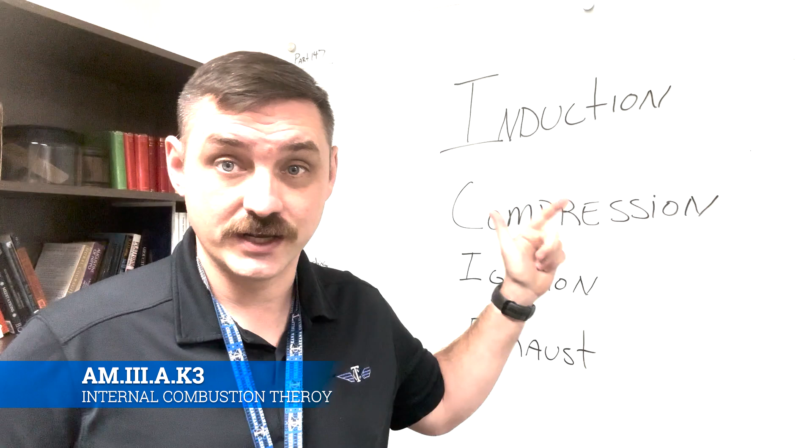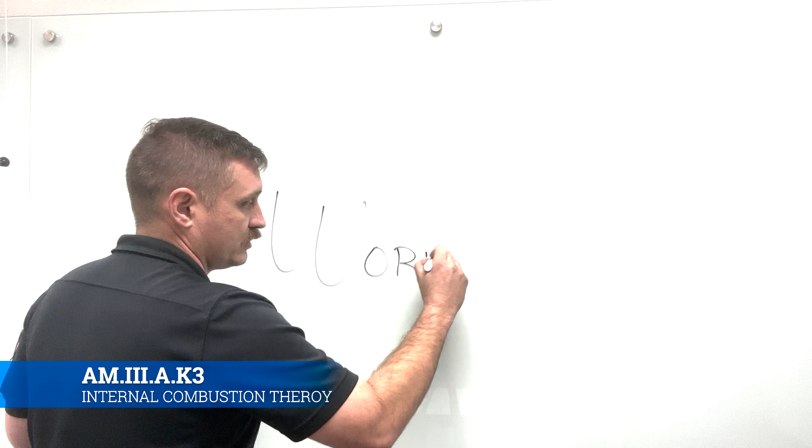Okay, since this is our first video on engines, we want to talk about some basic engine terminology that's going to get thrown around a lot, and we want to put some definitions to it so that way we all understand what we're talking about. First one that we're going to talk about is work. All right, so what is work?

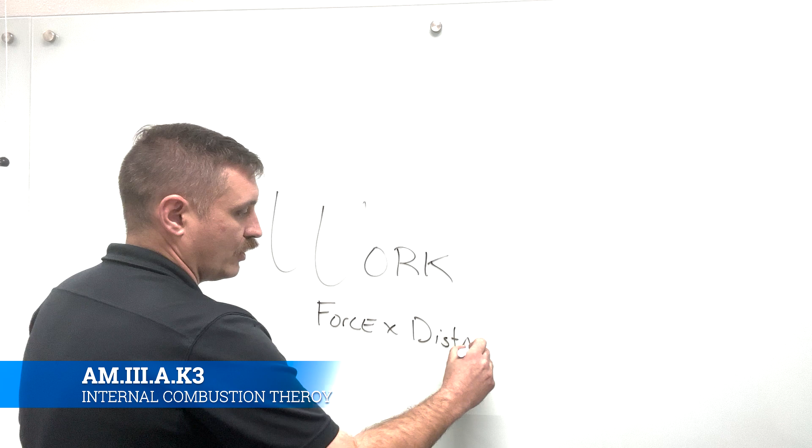Work is nothing more than the force required to move something over a set distance. That's all that work actually is. It's just force times distance equals work accomplished. All right, horsepower. Horsepower is another one.

Put yourself in the time period whenever the engine first came around. It's like the Industrial Revolution. Everybody's actually using horses. Horses made it all the way through World War I, and horses are even still being used in World War II. There's famous episodes of Band of Brothers where they end up shooting up a bunch of dudes on a horse cart, I think on the night that they jump into Normandy.

If you watch the movie Fury with Brad Pitt, they'll talk about how they killed so many horses during the first days of Operation Overlord. The reason being is that horses were still widely used. They were cheap, they were readily available, the infrastructure was already set up for horses, and so it became natural to compare the work of a horse with the work of an engine, and so that's how you get 1 horsepower, the power of 1 horse.

So I guess you're either loading it up on your horse or a wagon, or you're running off with it by foot. Either way, it had some advantages. So what is a horsepower?

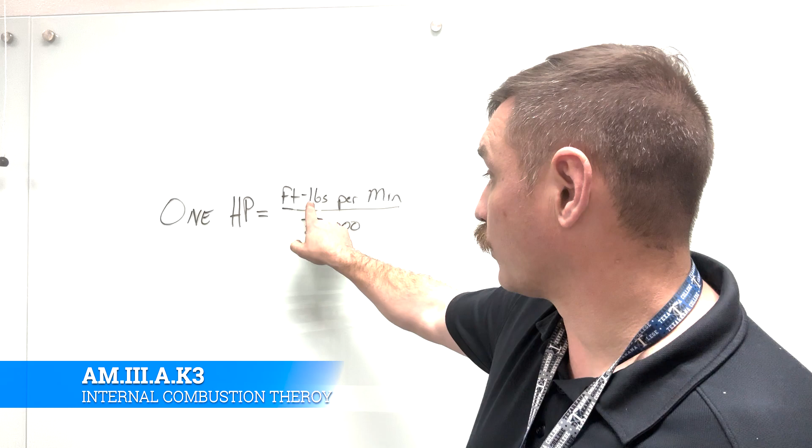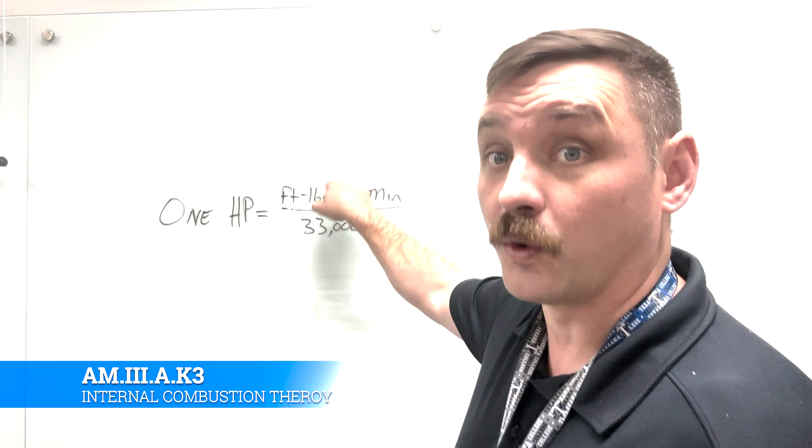Okay, 1 horsepower is equal to the foot-pounds per minute divided by 33,000. It's a ratio between foot-pounds over 33,000. Remember, work is the force, this time rated in pounds, how much weight it has to go over distance, or multiplied by distance. So you'll say, foot-pounds, that's that work, work done inside of 1 minute divided by 33,000. Now you can also do it by seconds and divide it by 550 pounds.

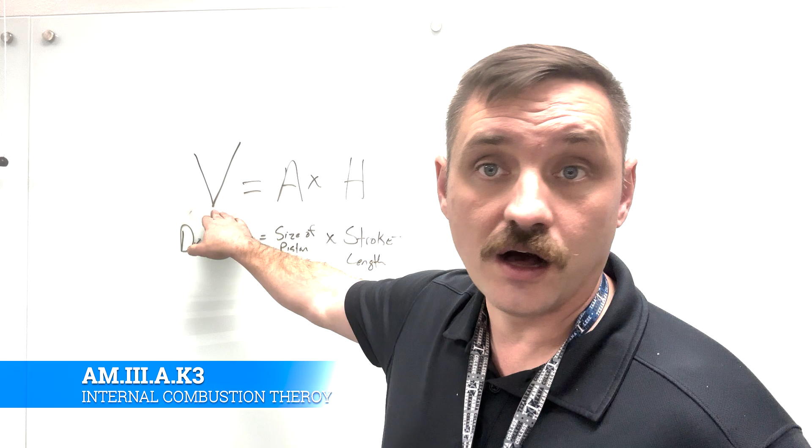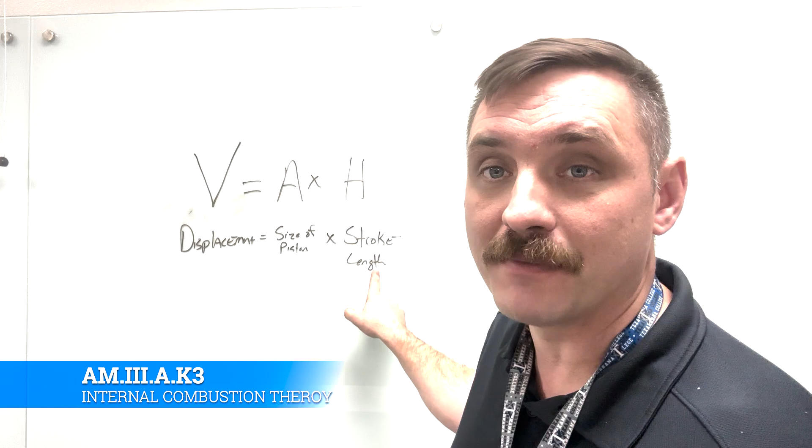Okay, so piston displacement is nothing more than the volume of a particular cylinder, right? That's going to be area times height, or displacement equals the area of the head of the piston multiplied by the stroke, the length the piston has to travel. That gives us the cubic inches of volume that piston is displacing. So you'll hear displacement thrown around a lot in engine talk. That's what they're talking about: the amount of air inside of that cylinder that's actually getting displaced every time that engine turns over.

So if you had a 4-cylinder engine like an IO320, if we're going to stick with the IO320 for the rest of the video, it has 4 cylinders. So if the displacement is 10 cubic centimeters, you would multiply that times 4. So now it's 40 cubic centimeters of displacement. Now, I have no idea what the IO320's displacement actually is, but that's how you would figure it out. So anytime you hear displacement, this is what they're talking about.

All right, let's talk about indicated horsepower versus brake horsepower. People will throw around brake horsepower all the time. They'll say this engine has 100 brake horsepower, but they don't really know what brake horsepower actually means, because they don't know what indicated horsepower means. Indicated horsepower is the amount of power that the engine actually develops without any friction taken into account. So it's always going to be higher than your brake horsepower, because brake horsepower takes that friction into account.

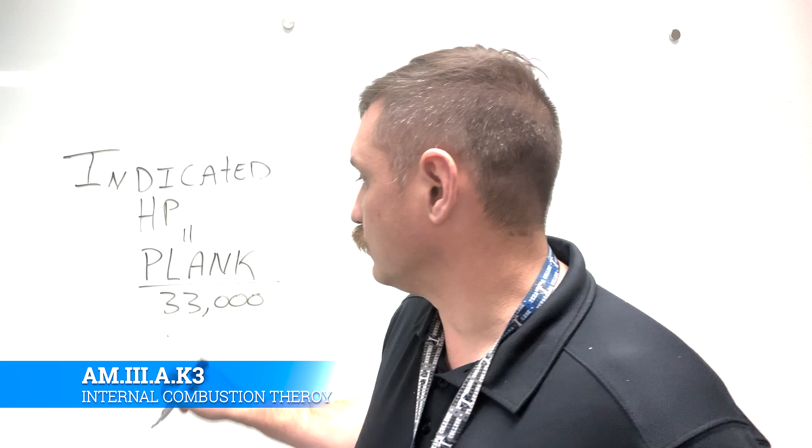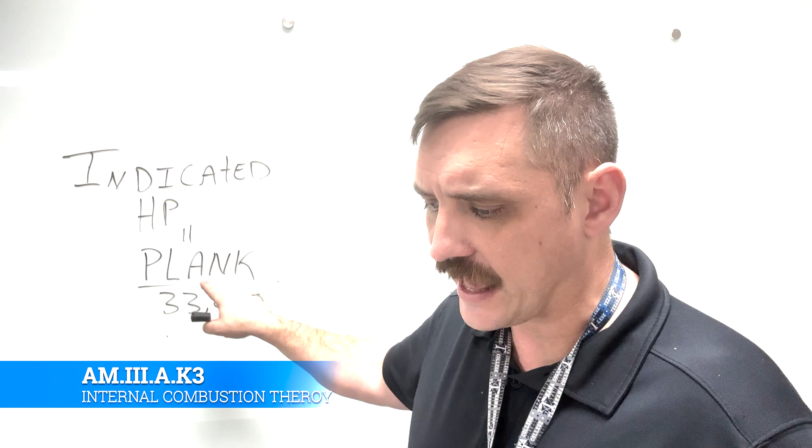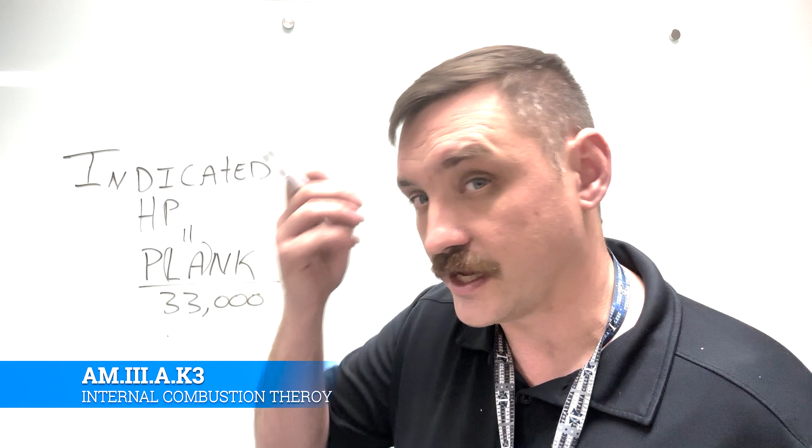The way that we calculate indicated horsepower equals PLANK divided by 33,000, where P is the indicated mean effective pressure in PSI. So that's how much pressure the engine is developing. L is the length of the stroke, so how long that piston is moving up and down. A is the area of the piston head or cross-sectional area of the cylinder in square inches. So here's your displacement right there, and this is the actual pressure.

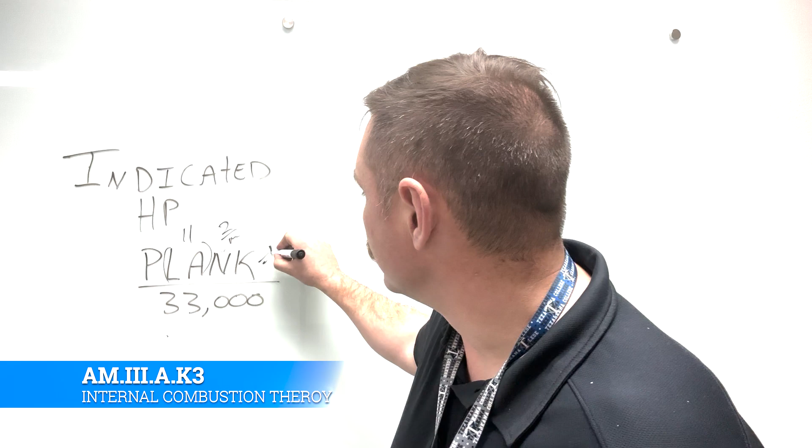N is the number of power strokes in a minute, so like RPM, expressed as strokes per minute for that particular engine. And then K is the number of cylinders. So in our case with the IO320, this is going to be 4. You'll total all that up, divide by 33,000, and that gives you the indicated horsepower for that engine. Now let's look at brake horsepower.

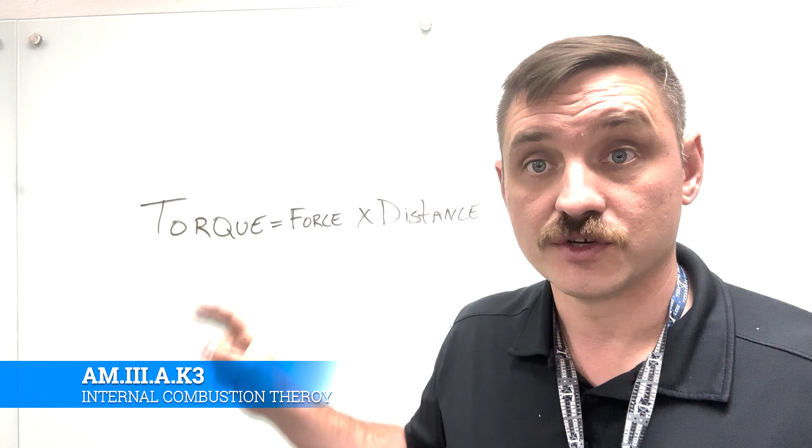Okay, brake horsepower is totally different. Whereas indicated horsepower measures a lot about the engine internally, brake horsepower is a lot more focused on torque. Torque is nothing more than the amount of twist being placed on an object. We measure that twist by force times distance. Once we've figured out the torque of an engine, we can extrapolate how much brake horsepower is there.

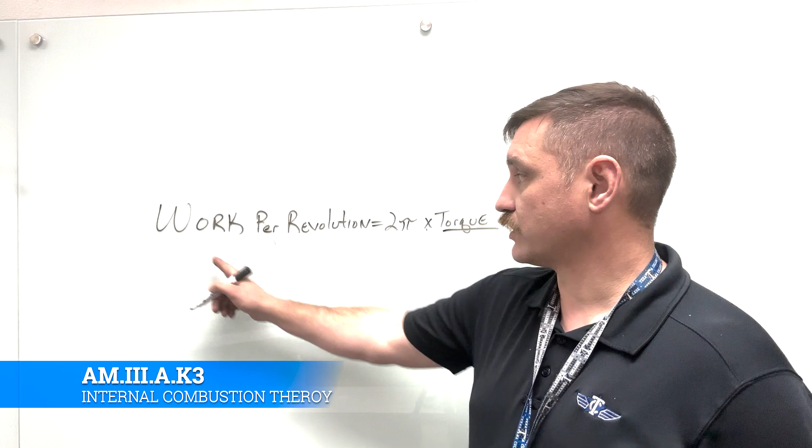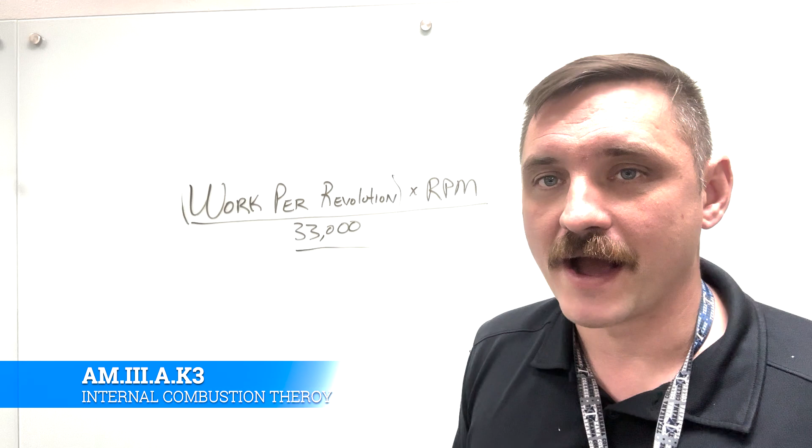We know the torque, so we can figure out the work per revolution by multiplying torque by 2 times pi. That gives us our work per revolution. So the final step in figuring out brake horsepower is to take our work per revolution, multiply it by the RPMs of that engine, say 2,000, and then divide it by 33,000, our magical horsepower number. This will give our actual brake horsepower at the wheels.

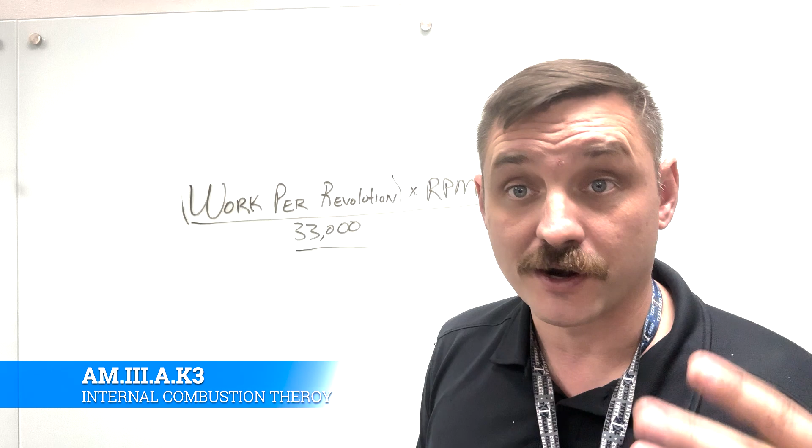So whenever you put a car on a dyno or use a prony brake to actually figure out how many brake horsepower you actually have, you can then look at your indicated horsepower on the other side. And you say, oh, well, this is what brake horsepower is, but indicated says this. And that will tell you how efficient or inefficient your actual engine and your drivetrain is.

You can look and say, okay, well, we have 100 indicated horsepower, but we're only getting 50 brake horsepower. That means that we're losing 50 horsepower somewhere in the midst of that. And the older an engine gets, the older a drivetrain gets, the more horsepower loss you'll actually have.

If you like to watch old car shows and stuff, they'll always make a joke that, oh well, this is supposed to have 1,000 horsepower, and then they all laugh because they know that this car is super duper old, and so they only know that it has like 200 horsepower because of all the wrongness that's going on inside of the engine.

When you look at an aircraft, it's the same thing. The engine may be rated for, say, climbing at a certain airspeed, because it's rated at a certain horsepower. But the thing is that as the engines age, as they wear down, as they break down, they have a lower and lower brake horsepower. They just get worn out, just like people do.

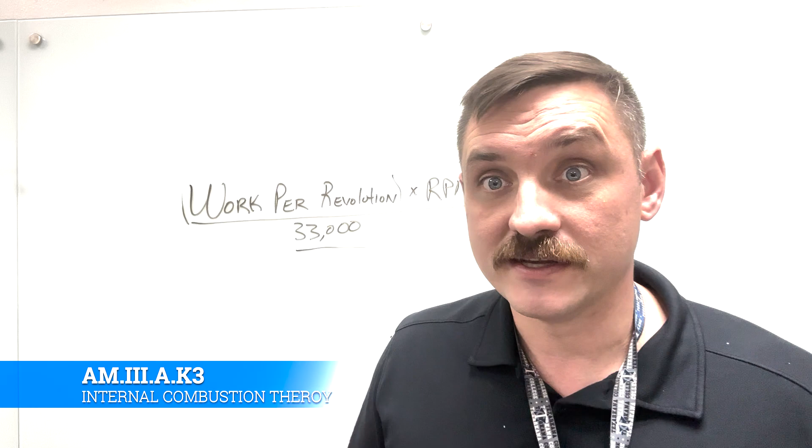Like my grandma can't run a marathon the way that my cousin can. It's just because one of them is in their 90s and the other one's in their 20s. It's really that simple. So that is the difference between indicated horsepower and then brake horsepower.

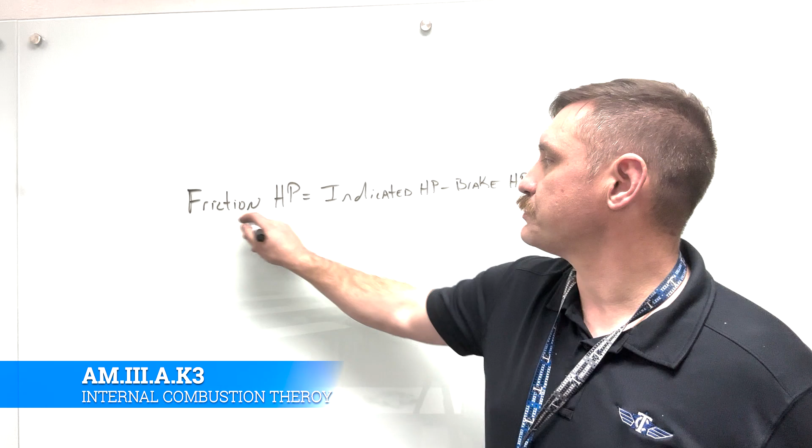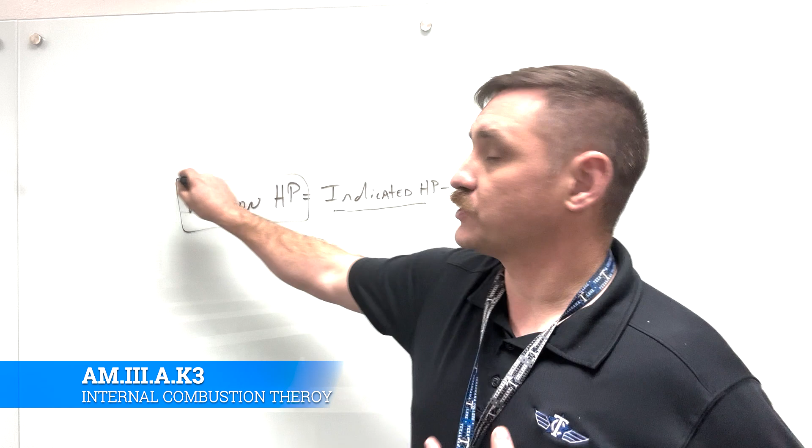Okay, now let's talk about friction horsepower. All right, and there's nothing really more to talk about than what we already have. It's simply indicated horsepower minus the brake horsepower, and that will give you the number of how much horsepower you've lost in the production of that brake horsepower.

It's just a more succinct way to say this is what we should be producing or what we actually are producing versus what we are actually receiving at the wheels or on the prop or whatever. And that difference between the two is friction horsepower.

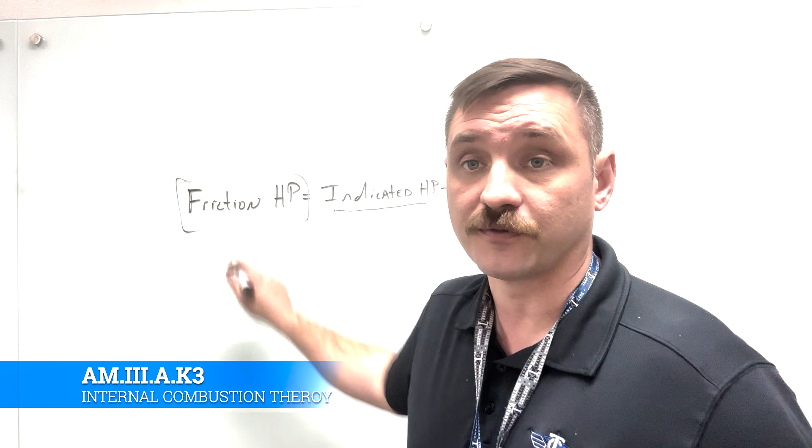Okay, so compression ratio. We talked a little bit about this in general when we were talking about ratios. Now let's dig into and figure out what exactly a compression ratio is. So here's a definition out of the book. The compression ratio of an engine is a comparison of the volume of space in a cylinder when the piston is at the bottom of the stroke to the volume of space when the piston is at the top of the stroke. So let me draw this out.

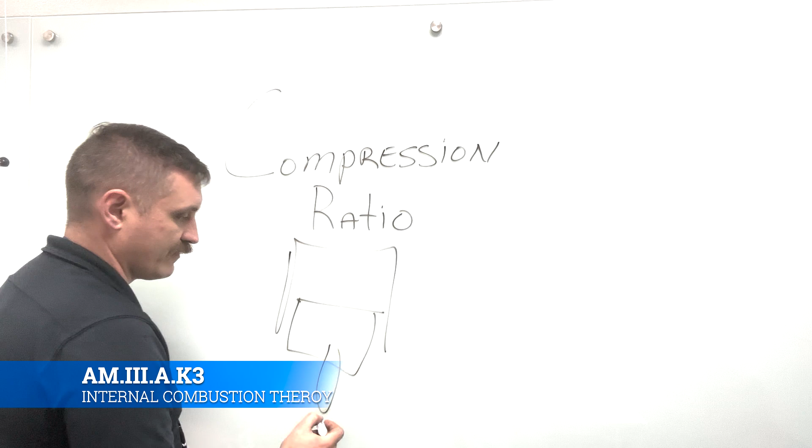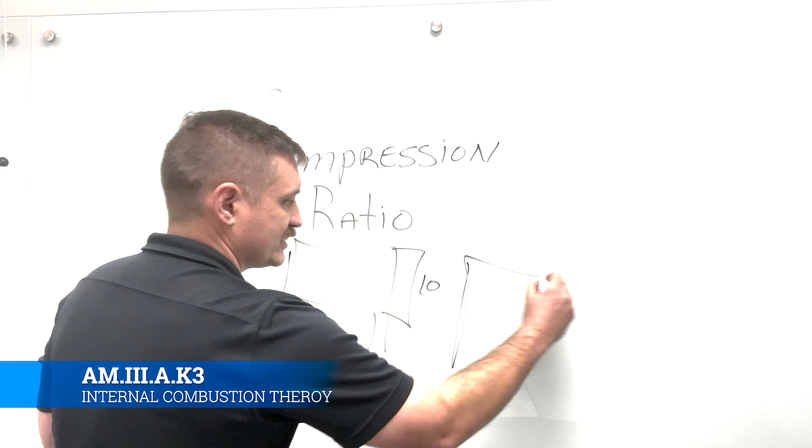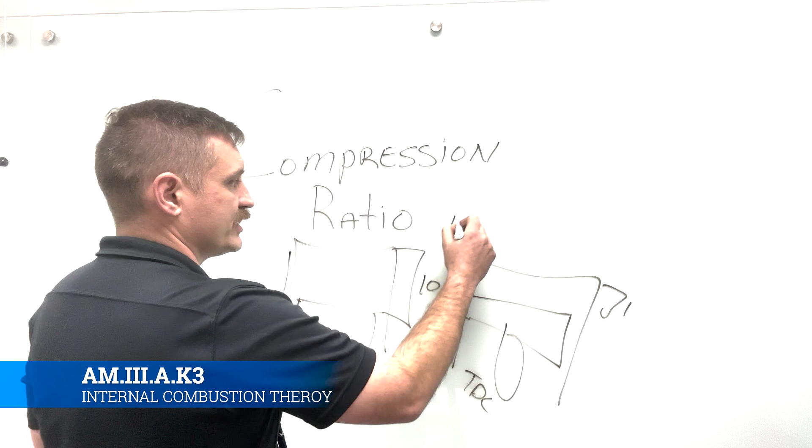So if you have a jug, and you have a cylinder, or you have a piston that's going in there, you have a space. And so this is going to be bottom dead center right here, all right? There you're at BDC, and say it's 10, okay? Then the same piston comes up, let's say at top dead center, so there's TDC, we'll do it over this side, it's 1. So this has a compression ratio of 10 to 1. That simple. And so that allows you to get a feel for what that piston's travel is inside of the various strokes.

Okay, so why do we want to know the compression ratio? Why is it relevant? Let's just keep reading in the book here. It says compression ratio is a controlling factor in the maximum horsepower being developed by the engine. So different compression ratios, that controls the total power the engine can actually develop. But it's limited by present day fuel grades and the high engine speeds and manifold pressures required for takeoff.

All right. For example, if there are 140 cubic inches of space inside of a cylinder when the piston is at bottom dead center, and there are 20 cubic inches of space when the piston is at the top of the stroke, the compression ratio will be 140 to 20. This ratio is expressed in fraction form, which would come down to being 7 to 1. So 140 divided by 20 is 7 to 1. That's a 7 to 1 compression ratio.

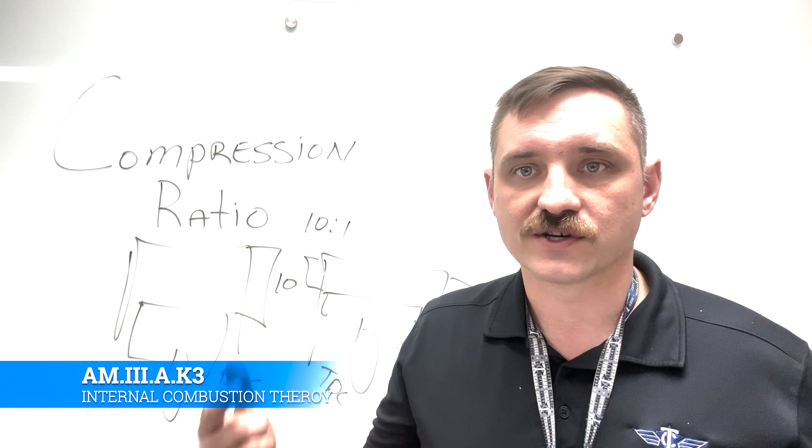The limitations placed on compression ratios, manifold pressure, and the manifold pressure's effect on compression pressures has a major effect on engine operations. Manifold pressure is the average absolute pressure of the air or air fuel charge in the intake manifold, and is measured in units of inches of mercury. So you'll hear people talk, when they're flying complex airplanes, about 29 inches, or rules of thumb like 1 inch of manifold pressure equals 100 feet a minute drop or climb or whatever.

So that's what they're talking about. How much air is going into the engine translates into power. All right, manifold pressure is dependent on the engine's speed and the degree of supercharging, which we haven't got to the supercharger yet, so just table that.

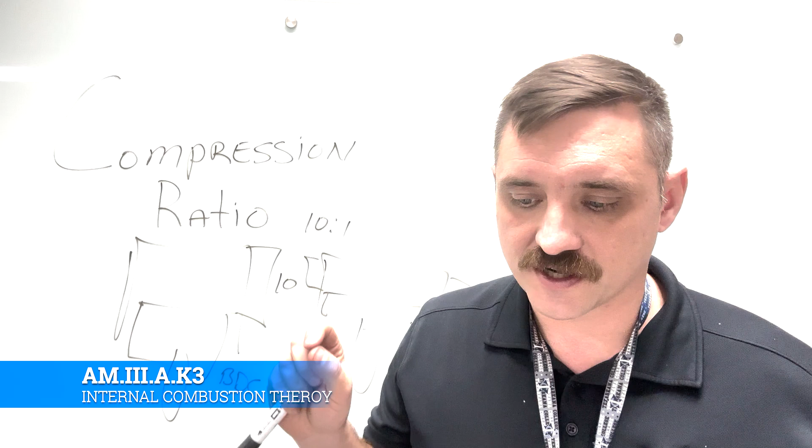The operation of the supercharger increases the weight of the charge entering the cylinder, and when a true supercharger is used with an aircraft engine, the manifold pressure may be considerably higher than the pressure of the outside atmosphere. The advantage of this condition is that a greater amount of charge is forced into the given cylinder volume, and a greater output of horsepower results.

Okay, that's good. Okay, another type of horsepower that we need to be aware of is thrust horsepower. This is simply taking the brake horsepower and then correcting it for propeller efficiency. So if you have 100 brake horsepower being delivered to the prop, and we know it's 100 on the money, but the prop is only 50% efficient, well, we only have 50 thrust horsepower. That's only 50 horsepower actually exiting the aircraft in the form of thrust to move the aircraft.

So the higher efficiency the propeller is, the more you're going to be able to take from your engine and convert to actual work. And so the way that actually matters to the pilot is that I can do more with less. If I have 100 horsepower, and I know 100 horsepower gets me in the sky, if I have a high efficiency propeller, I don't have to keep throttling past that 100 horsepower to get to the 100 horsepower of thrust horsepower, if that makes sense.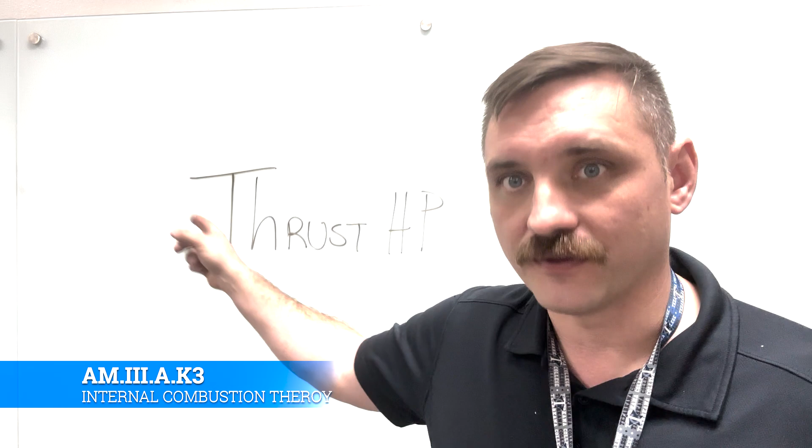So essentially, if you have a 100% efficient propeller, which you won't, then whatever you set your engine horsepower at, that's what the propeller should be producing. However, there's a lot of reasons why that propeller will be less efficient. If it's old, if it's torn up, if it's not taken care of, you're going to lower the propeller efficiency every single time. However, if you want to improve that, maybe you get a different propeller, a higher pitch propeller, blend out any dings or scratches, make sure it's balanced right. All those things matter for the thrust horsepower.

Okay, so now that we have a common vernacular, a common understanding of the different terms that we're going to use talking about engines going forward, let's continue our talk about horizontally opposed engines and their components. All right, we're going to start by building our understanding on reciprocating engines, recip theory. You'll hear recip used a lot, and that's just short for reciprocating. All a reciprocating engine is doing is that suck, squeeze, bang and blow using a piston. Now that piston is going to have multiple strokes.

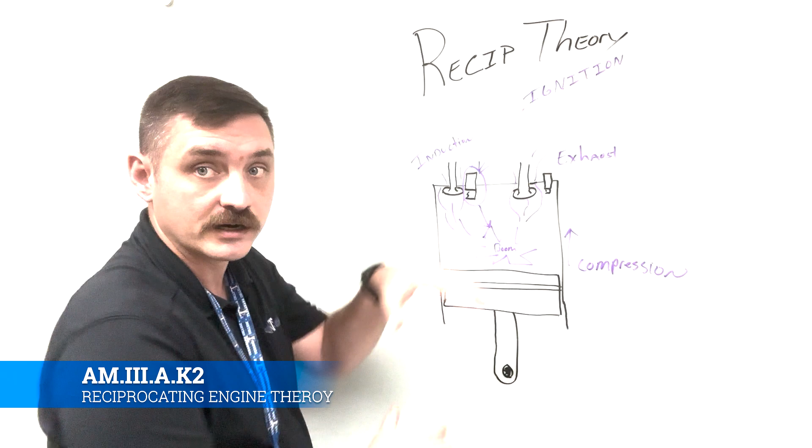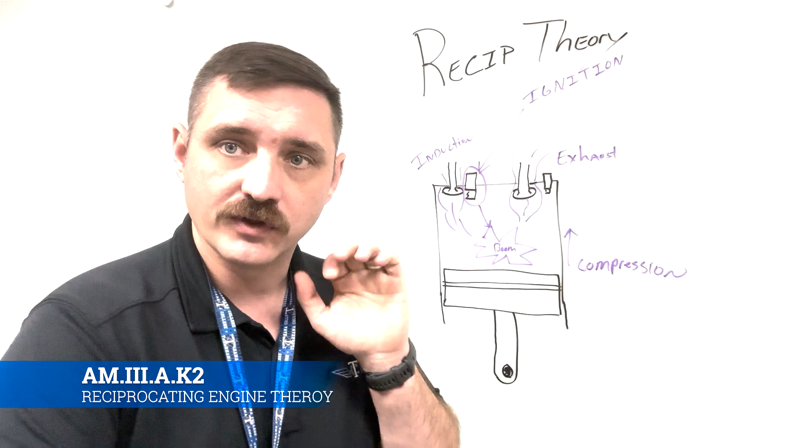All right, the first stroke is going to be the induction stroke, the intake stroke, where it's going to pull down. Now, the cylinder, if you imagine this cylinder with this piston sitting in there, is airtight. So on a good engine where the compression is still good, you can take the spark plugs out and spin the propeller and you'll hear the air go into it. And you'll also be able to put your thumb over the hole and keep spinning the propeller. As the piston comes back up in the compression stroke, it'll blow air out of it. And that's how you know that you have good compression.

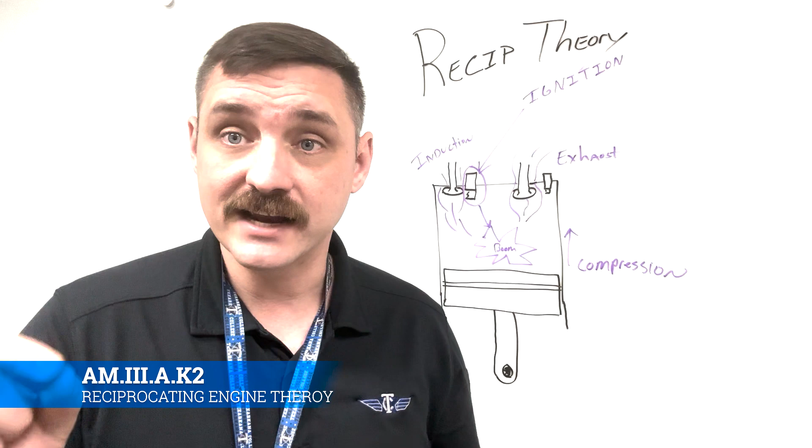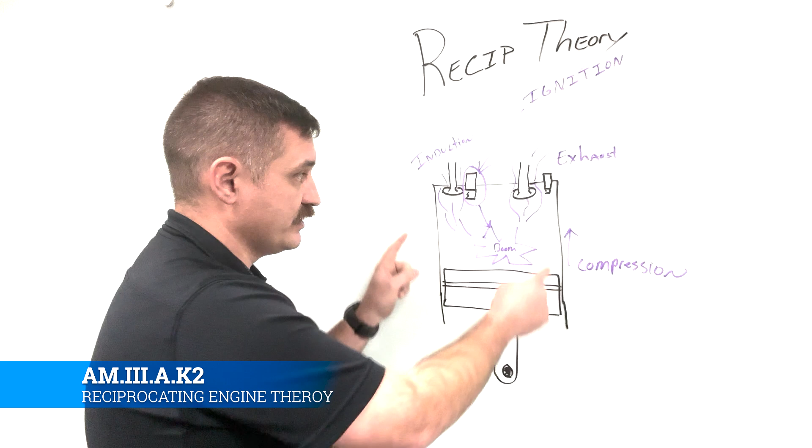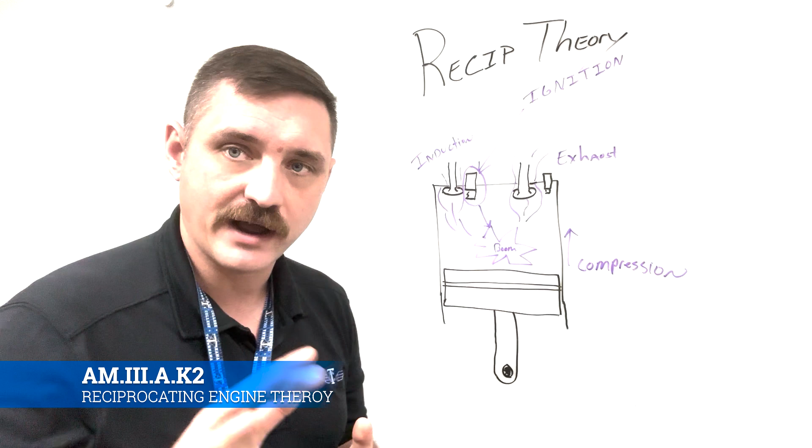And we're going to teach you how to check it so that you know quantitatively that it's good compression. But either way, to understand the induction stroke on a reciprocating engine, you have a piston with piston rings that creates a seal on the side walls of the jug or the cylinder. As the piston comes down, the intake valve is going to open up and allow air into the cylinder. Then when it comes back up, it's going to close that valve, and we'll get to how in a little bit. As the valve closes, the piston is going to come up and squeeze that air in the compression stroke. Remember, suck, now squeeze.

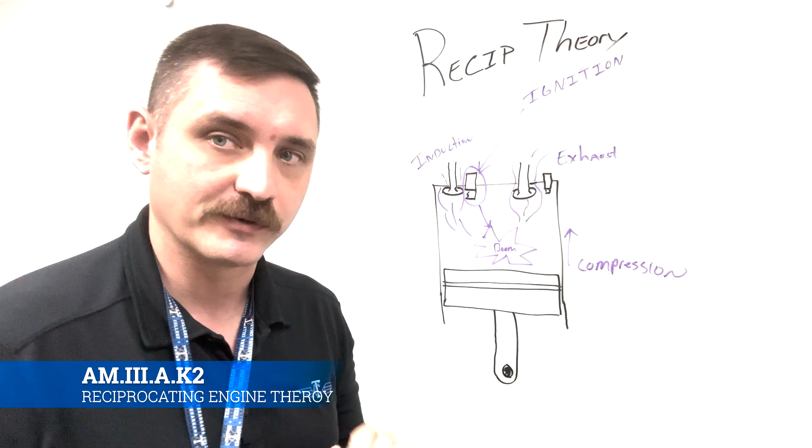Then you're going to have fuel injectors, depending on the type. You have carbureted and fuel injected engines, a little bit different. We'll get to that in a minute. But you're going to have fuel that's added to that air as it gets squeezed. Now, once the piston hits a point called top dead center.

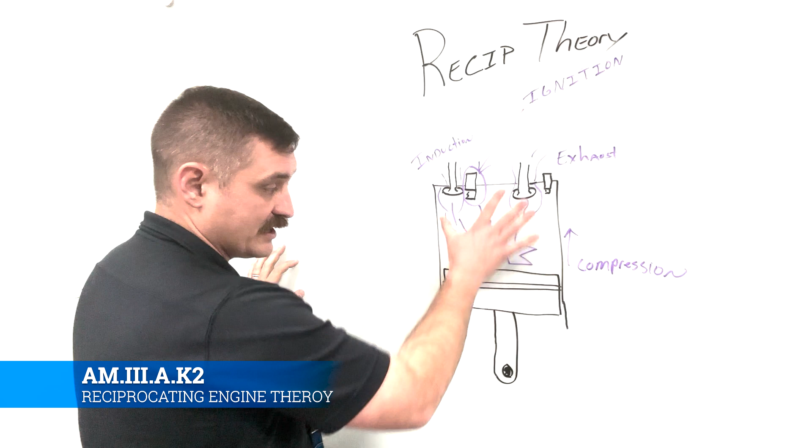So remember that the piston goes up and down. So bottom dead center is whenever the piston is at the bottom, and it's not going to go any lower. And then top dead center is whenever the piston is at the top. It's not going to go any higher.

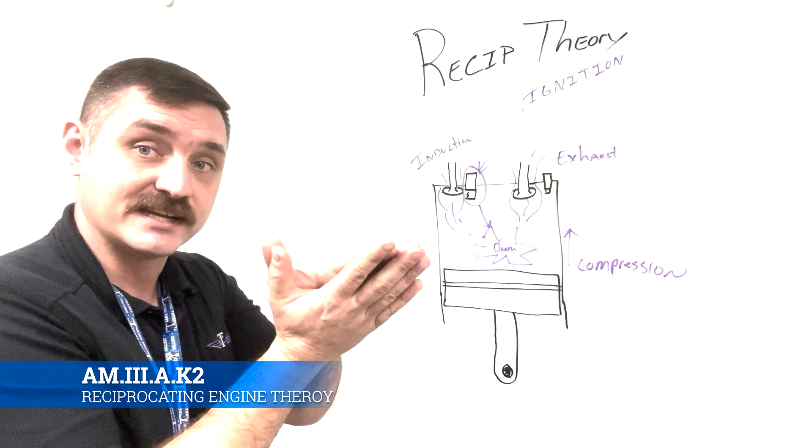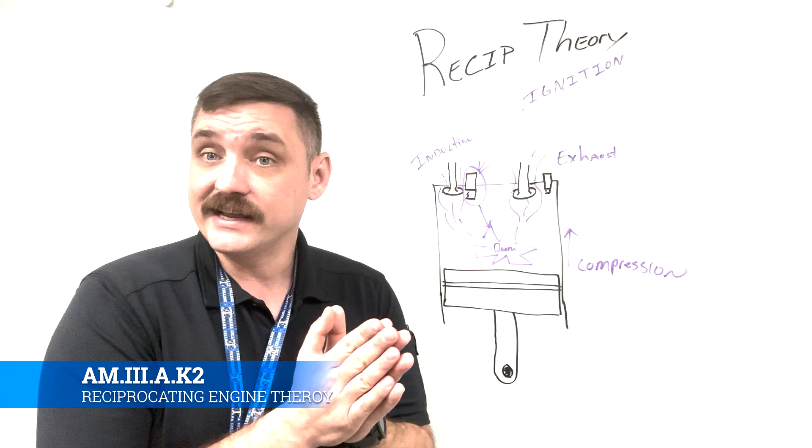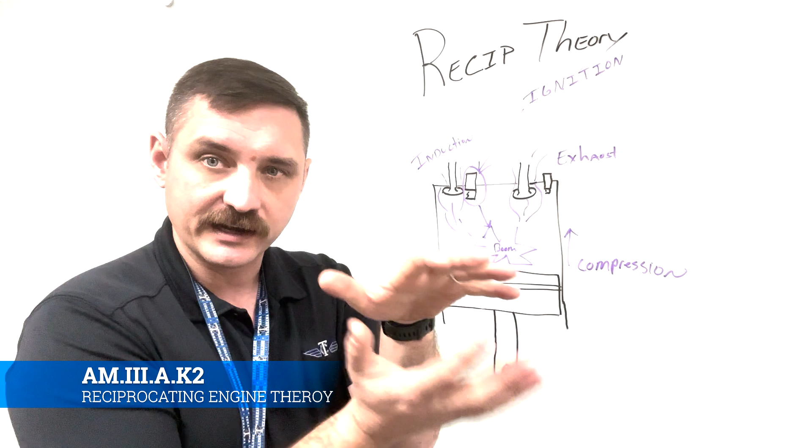So at top dead center, the spark plugs will start to spark. All right. Now it actually does it right before, we'll call it the spark advance. It does it right before it hits top dead center. So ideally, as the piston is coming up to top dead center, the spark plugs have already started to spark and create an explosion in there, so that the two meet in this nice little equilibrium where it gets the most out of the subsequent explosion that happens after that.

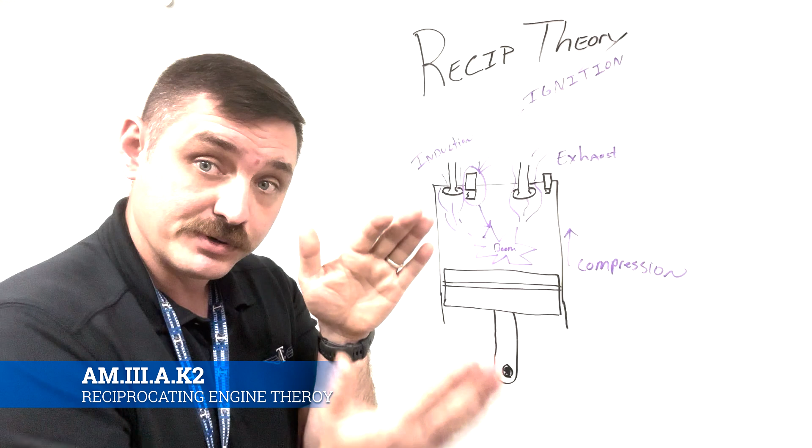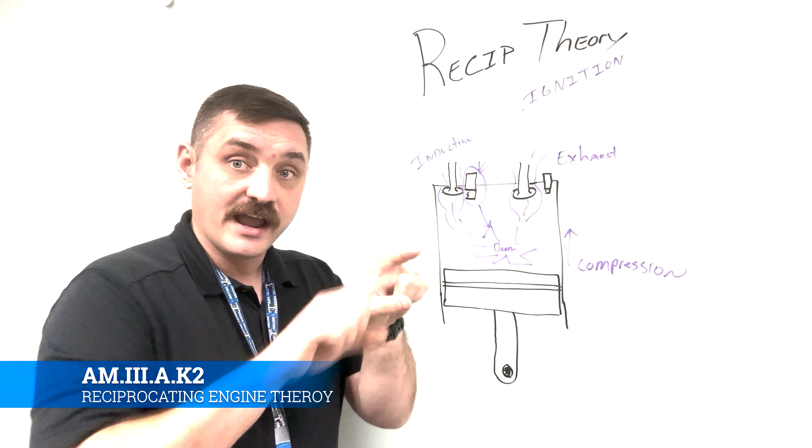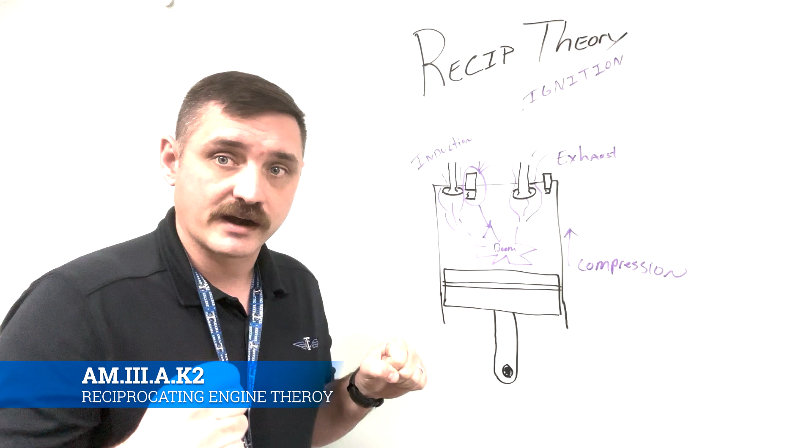Now, as it explodes, it's going to push the piston back down. What the piston attaches to is the crankshaft. That crankshaft is going to spin as the piston pushes it back down, because the crankshaft is set up in like a jagged pattern, and as the crankshaft goes around, it's moving the piston up or down. And we'll get into that here in just a little bit. As the piston comes back down, it takes all of that power, spins the crankshaft, which then goes on to be used as actual work somewhere else.

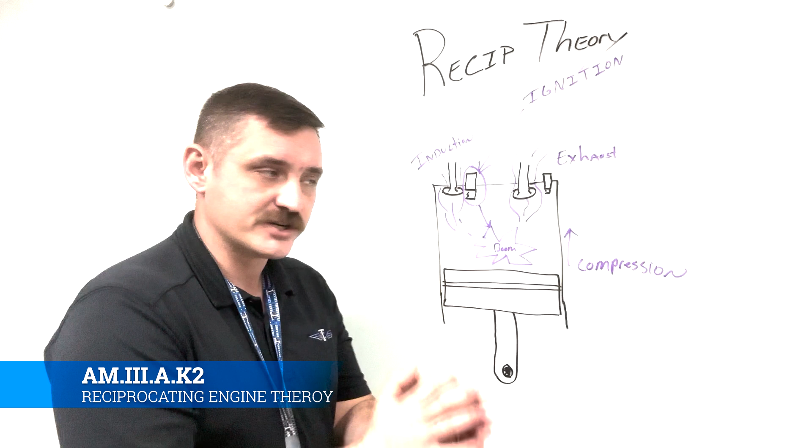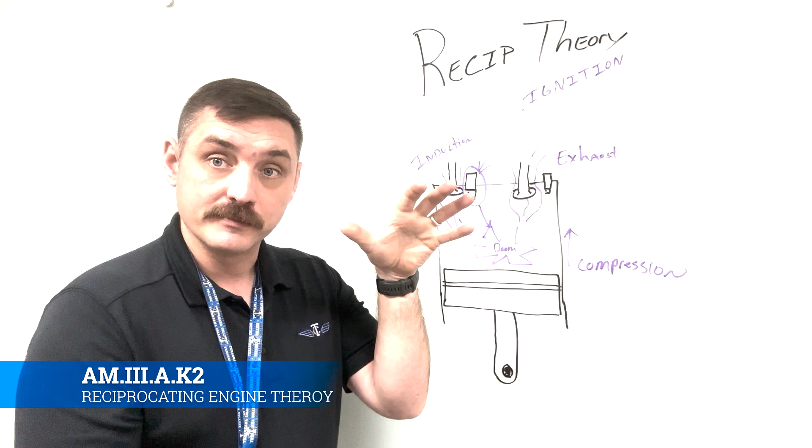All right. So we've got the suck, the induction phase, the squeezing, the compression phase of engine operation, and then the bang, which is going to be the fuel and the spark plugs. Bang, boom. That happens, and then as it goes back down, the exhaust valve is going to open at bottom dead center, and then the piston is going to come back up and blow all of the exhaust, all the smoke and stuff that you see coming out of your tailpipe starts here, and then goes out the exhaust, then out the exhaust manifold, and then exits the airplane through whatever their exhaust system is.

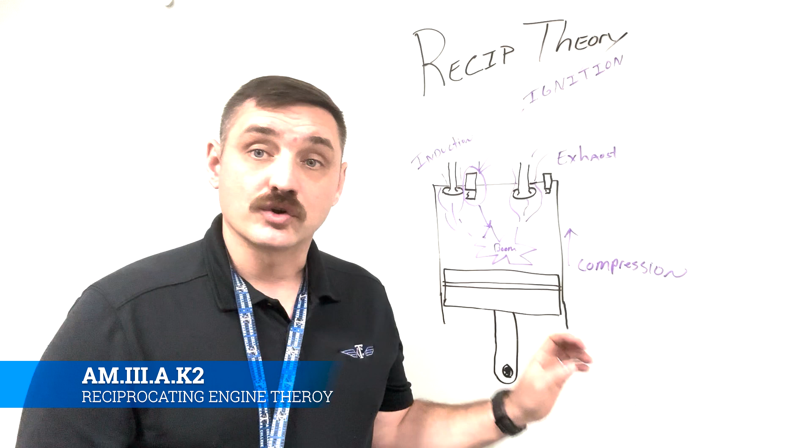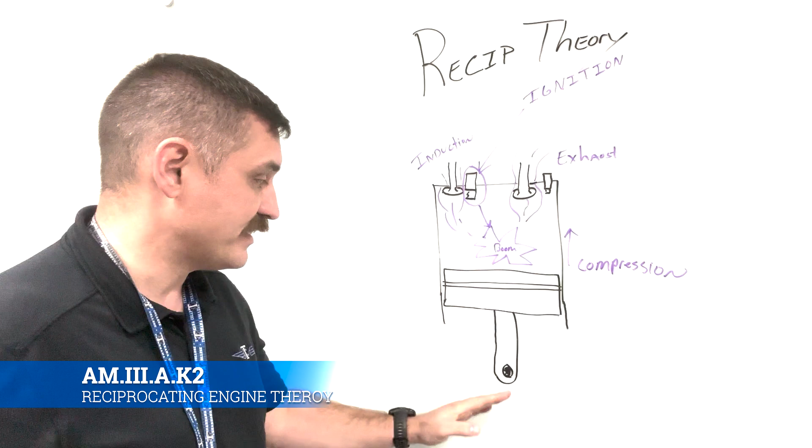But that's it. That is reciprocating engine theory. Now there's a lot more to it. There's all kinds of, like, where does the spark come from? So it's going to have magnetos or coils or whatever. How does the work get transferred from point A to point B? How does the piston attach? These are all details that we're going to cover in later videos.

But for right now, all we really need to remember is suck, squeeze, bang, and blow. The induction phase, the compression phase, the ignition phase, and then the exhaust phase, if you want to be prim and proper about it. But they all mean the same thing. It's just easier to remember the four smaller words. So that is reciprocating engine theory.

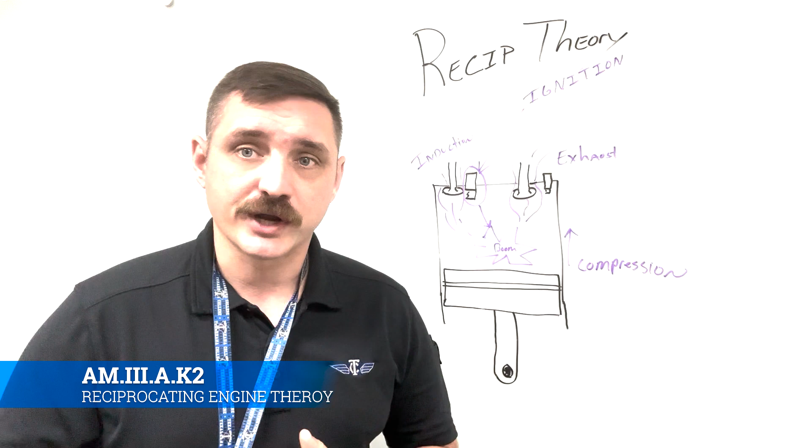Okay, so the foundation of every engine, any engine, is going to be the crankcase. This is what gives the engine its shape, form, and allows everything else to happen. It also provides a space to house all the engine oil, which allows the engine oil to swirl around, clean the engine, and then drop the engine oil temperature by that. And we'll get more of that in the engine oil theory section.

However, there's two things that we need to take away from the crankcase. Number one is the nose of the crankcase. This is where the propeller mounts up to. So if there's a propeller governor, reduction gears, or anything else like that, it goes on the nose, the forward end of the crankcase.

The other one is probably even more important, especially for GA guys: the accessory section of the engine. This is where all your vacuum pumps, your magnetos, anything that is unique to that engine is going to be mounted back here. That's going to use the engine power, or is going to be a critical component to the functions of the engine. If it gets mounted directly to the engine, it's going to happen back here in the accessory section.

Now, the heart and soul of an engine really is the crankshaft. That's where everything comes together, from the load that it's going to be carrying, so in this case the prop, to the pistons that actually produce the power itself. Everything gets tied together to the crankshaft.

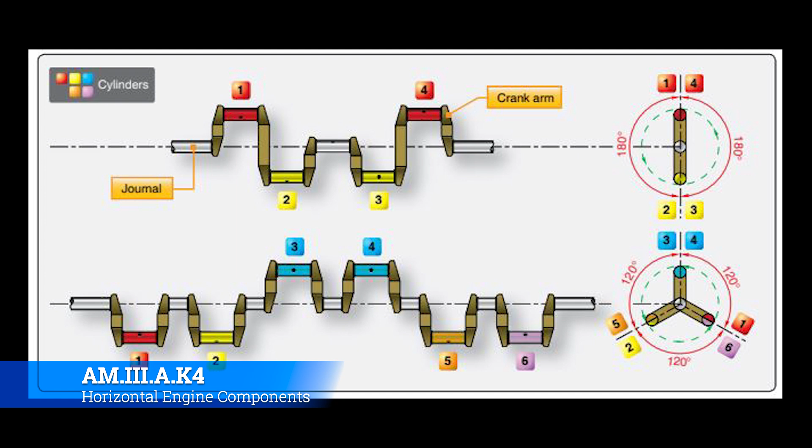And so you can see that the two outermost cylinders are on one phase of operation, probably the exhaust phase. And then the two center cylinders are on their compression phase, to where they're going to fire and then go back down. And as they push the crankshaft down, the other throws are pushing on those rods that are pushing the pistons into position for the next round of firing. And so you can see where the crankshaft really is kind of the heart of the entire engine.

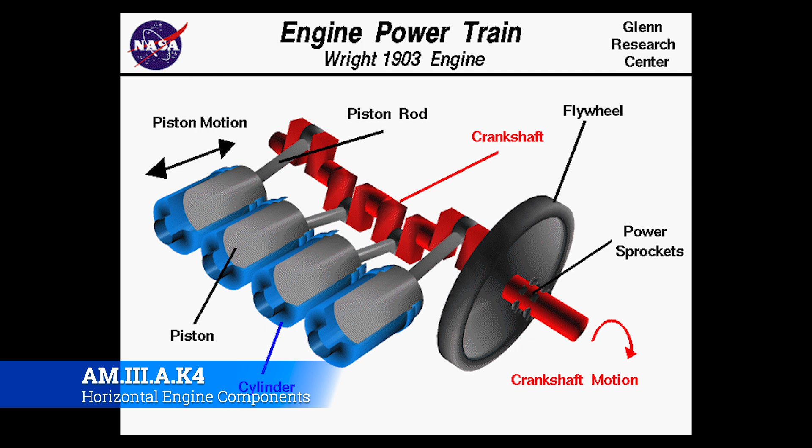Now, the book actually says it's the backbone. I don't agree with that. I think that the case itself is the backbone. It's what keeps everything together. But really, the crankshaft is where everything happens, at least in terms of motion.

It's also how you're going to manipulate the engine whenever you go to do compression tests and magneto timing and things like that. It's just by grabbing it and then turning the crankshaft. And as you turn the crankshaft, you also move the pistons up and down.

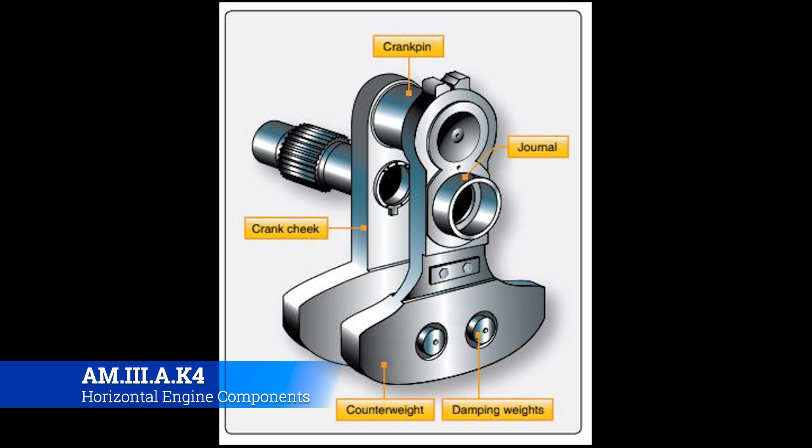That's only going to be used for V-type engines, which you generally don't ever see. As a matter of fact, I can't think of a single aircraft that has a V-type engine in it. I'm sure there's probably one out there that I'm not thinking about, but generally speaking, we use horizontally opposed engines, and we'll get to what that is here in a minute.

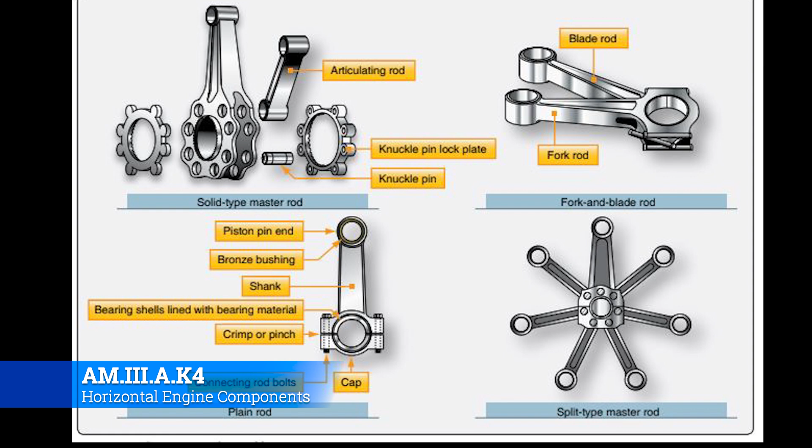Then you're going to have a series of rings, to include an oil control ring and a compression ring. The oil control ring sits on the bottom. It basically doesn't let the oil come up into the cylinder, and this all will start to factor into troubleshooting. When the oil control ring starts to fail, you'll start to get fouled spark plugs.

You'll start to see heavier exhaust, especially blue exhaust, because you'll start to get oil burning with the fuel up in the cylinder, and the oil is not nearly as refined as the avgas or the automotive gas that's burning inside of that cylinder, and so it'll get a lot more gunky, and that causes all kinds of problems.

Then you'll have the compression rings that sit on top of the oil control ring, and that basically keeps metal on metal contact inside of that cylinder, so that way it maintains the compression. So whenever we do our compression check, what you're looking for, and it could come from a variety of things, but one of the primary things is: is the ring still holding that seal the way that it's supposed to?

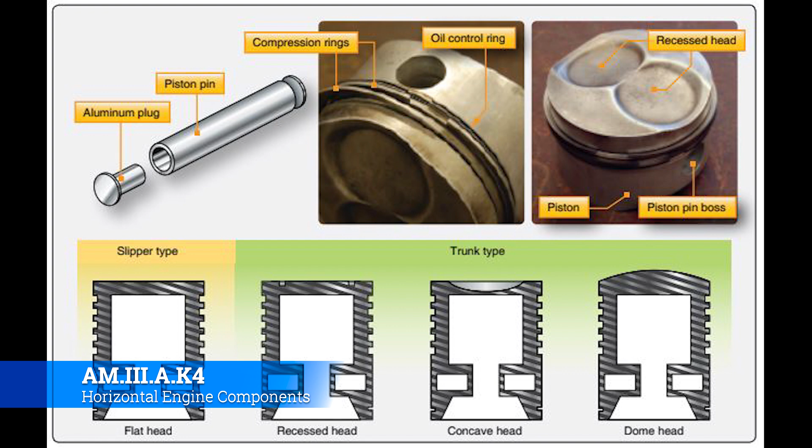It's got this little half moon kind of shape that's taken out of the top of the head. And then you have the dome head, which is the exact opposite of that. Instead of being hollowed out, it's domed up over the top. And those are the different styles of heads that you could come across. Now these heads are used for a variety of different reasons. A lot of the times they're trying to accommodate valve clearances, or maybe the spark plug clearances, or optimize for efficiency or power or whatever.

Every engine is a little bit different, but this highlights a couple of things. One is that we make sure that we use the right part number on the right engine, because if not, let's say you have a dome head on a piston, and you install it there. The first time it cranks up and it smacks a valve as the valve is coming down, you've basically created a lot of problems for yourself. You more or less destroyed that engine.

And at the same time, if you have a flat top but you need a dome head, you may not get nearly the compression or the performance that you're looking for. Maybe it runs, but for whatever reason it just does not produce enough power. Well, it's because it's not compressing enough, because the original design accounted for that dome head, and now it's not there, so you're not getting nearly the amount of squeeze that you absolutely needed.

And so it's really important that we use the right part number for the right engine to make sure that we adhere closely to that TCDS approved original engineering of that engine, unless it's been STC'd appropriately.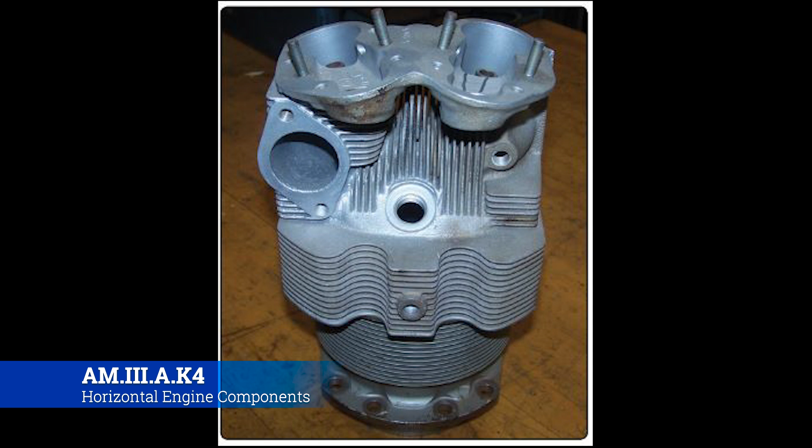Alright, so probably one of the most replaced pieces of an aircraft engine is the cylinder head, it seems. They'll get too hot, they deform, they just get worn out over time. You name it. So get used to having to deal with the cylinder heads. You'll also hear these called jugs, as kind of a pet name for cylinder heads by old mechanics. Most of the younger guys won't ever call them that, but the old guys will.

Now, these things have to be strong enough to withstand the internal pressures developed during engine operation. So think that it has to hold an explosion like 2,000 times inside of a minute, and it has to do that for hours on end. And they do. Usually these engines will go for a long, long period of time, and you might end up having to replace a jug here or there.

But so be it. They also must be constructed of lightweight metal to keep the engine weight down. Imagine if these were all cast iron, they would get pretty heavy pretty quick. And these engines are still pretty heavy, even when they're all made out of aluminum. But the older engines were even heavier. They also have to have good heat conducting properties for efficient cooling.

That's probably one of the most important things on these engines, those cooling fins. What those cooling fins do is, the cylinder gets hot on the inside, and the cooling fins increase the surface area of the cylinder. So as it conducts the heat, as that heat distributes out throughout the rest of the cylinder, it has a greater chance of getting away, being pulled away and cooled down by the air as it comes through the cowling and then exits through the bottom of the cowling.

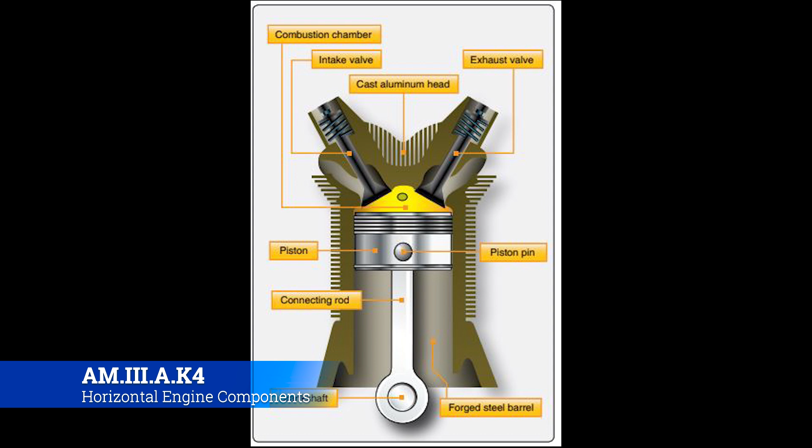And it's usually something really dumb, like a baffle, or something attached to the airplane that's not supposed to be there, and it might be just the way they're flying. Maybe it's a super fat dude, and the whole airplane is kind of tilted over to one side, and it's not catching the air right anymore, or whatever the reason. But the point is that cylinder head temperature will tell you a lot about engine health if you pay attention to it, and it's also critical for engine longevity.

But if you said, like, the rings are bad on a cylinder, like, well, which one? I'm like, well, it's kind of the one that's front to the left, but what happens when you pull it off the engine, and it just gets really, really messy.

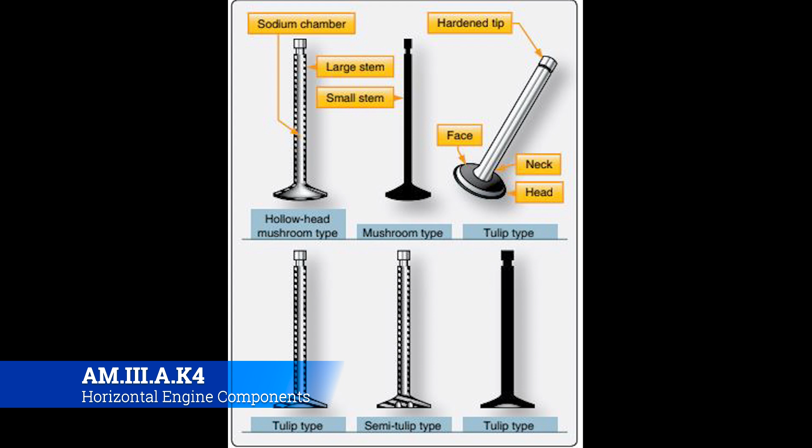All right, so the valve stem, which is the long part that connects the seat to the rest of the engine, acts as a pilot for the valve head and rides in a valve guide that's installed in the cylinder head for this purpose, which you can see right here. Now that valve stem comes to a little beveled end. That beveled end of the stem is hardened to resist wear.

Now the neck is the part that forms the junction between the head and the stem, and the tip of the valve is hardened to withstand the hammering of the valve rocker arm as it opens the valve. A machined groove on the stem near the tip receives the split ring stem keys, and the stem keys form a lock ring that holds the valve spring retaining washer in place.

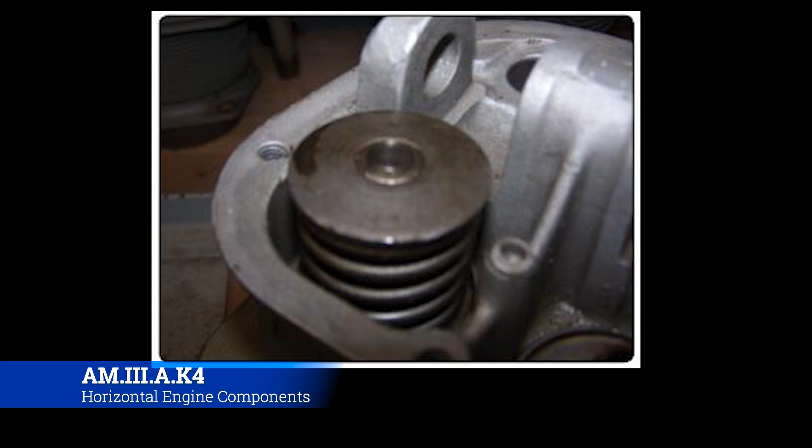Now, what you're looking at here is that retaining washer and the springs that basically keep the valve shut. So that spring wants to expand out, and the valve seats up against the cylinder, causing it to close until the rocker arm pushes down on that spring, which opens the valve. And then once the cam rolls off, the rocker arm goes backwards and it closes the valve, which we'll look at here in just a second.

So the next question becomes, well, how does the rocker arm get that motion? That comes from a push rod. The push rod pushes the rocker arm, which then pushes the valve stem, and the push rod gets pushed by a tappet, and the tappet then gets pushed on by a camshaft. Now the camshaft is simply a circular shaft with this little divot that comes off, and as that divot comes off, it pushes up on the push rod, that then pushes up on the rocker arm, that then pushes down on the valve stem.

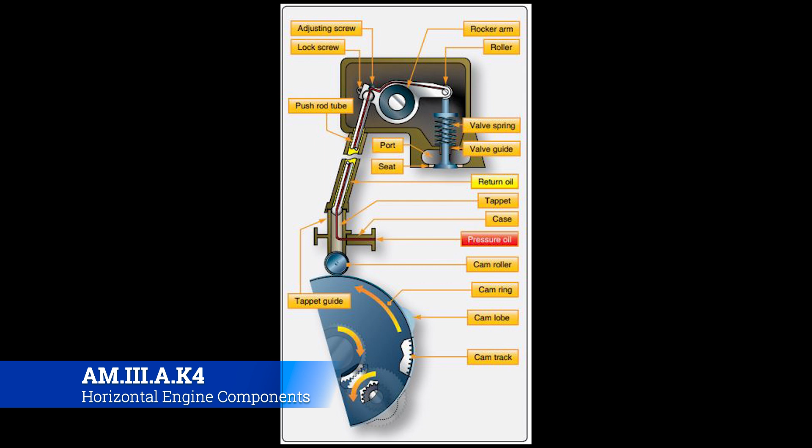When we talk about timing an engine, this is what we're talking about. We're trying to make sure that the spark advance is set right so that the spark starts lighting off when the intake valve is shut after it's opened up and put atomized fuel into the cylinder, and the exhaust is all out and clear, and then the piston is coming up. And you can see how timing becomes a major issue for an engine, because there's so much happening mechanically that if you have one of these things off, the engine won't run, or worst case scenario, it damages itself because the piston's coming up when the valve is coming down, or whatever the situation may be.

Now, some engines you'll see advertised as an overhead cam. What it's basically saying is that it's eliminated the push rods, or at least a significant portion of them, and the cams are sitting on top, pushing down on the rocker arms directly. So you lose a lot of lag that way, and you get a much more responsive and more efficient engine by having that overhead cam.

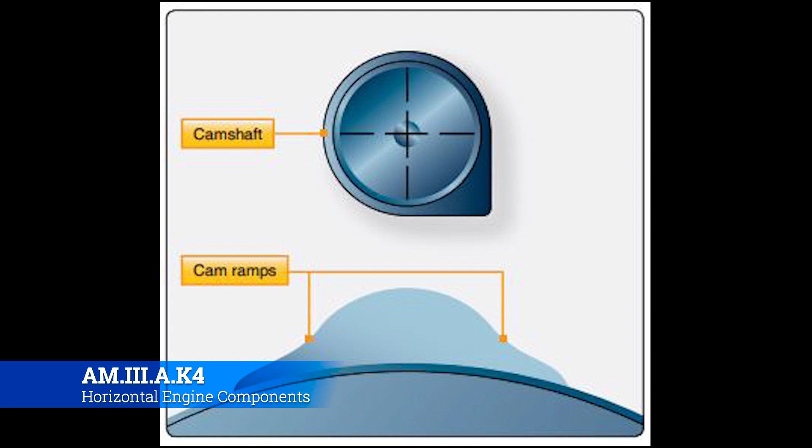The intake and exhaust are going to pipe into manifolds, either the exhaust manifold or the intake manifold. The intake manifold is going to gather up the atomized fuel and then push it into the individual cylinders. And the reverse is happening with the exhaust. It's going to gather up all the exhaust and put it together, and then off it goes into the exhaust, or the tailpipe, basically. Now, some aircraft will have straight pipes where the exhaust just comes right out, and there is no manifold at all. It really depends.

There is a school of thought that reducing the back pressure on the exhaust manifold will help increase the engine's efficiency, and therefore you increase performance. And that's true, it does. But really every manufacturer is a little bit different, because that engine has been optimized for a certain level of performance, and then the aircraft is certified on that. So you don't want to go and start chopping exhaust pipes to try to make them straight pipes or something like that.

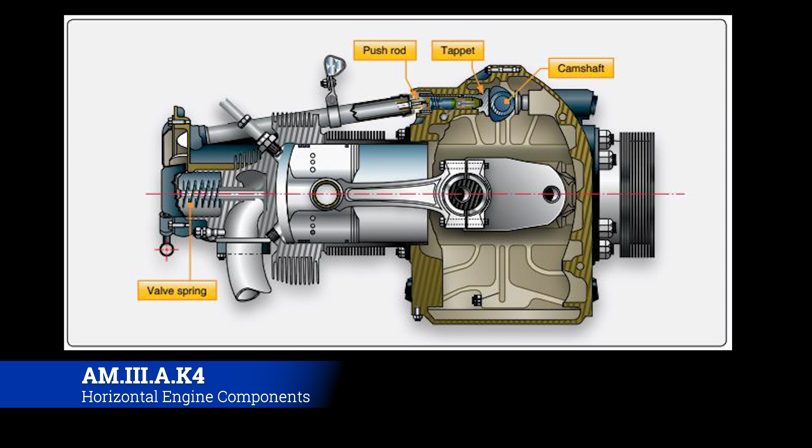It's really pretty straightforward, pretty simple. And you've got to think that this type of engine was developed well over 100 years ago, and it's been refined and changed and optimized for sure, but the actual bare bones of how it works is not really that complicated. Now, where it gets complicated is in some of the tolerances of these things, and making sure that they're assembled the right way, because since you're dealing with such high RPMs and such close tolerances, if things aren't perfect, you can really have a bad day pretty quickly.

Okay, so everything we've talked about so far is a 4-stroke engine, meaning that there are 4 strokes to the motor. There are 4 cycles. There are other types as well. There is a 2-stroke engine, really common with small engines, some boat motors, dirt bikes, that kind of thing. You may see some experimental aircraft out there that might have a 2-stroke. I'm not aware of any, but it wouldn't be out of this world to run into some random niche airplane that had a 2-stroke engine. But they're definitely not going to be commonplace at all.

Another thing that came around probably about 10, 15 years ago was the diesel engine in aircraft. The reason being is that diesel is more affordable, and also whenever you're operating in, say, third world countries, avgas is really difficult to come by, but Jet A is pretty common, and diesel even more common. And so you saw some people start to experiment with the diesel engine. It's also a lot more efficient, so it made flying a lot cheaper. There were several aircraft that came out, some really nice aircraft. I believe Diamond even had a twin diesel engine aircraft.

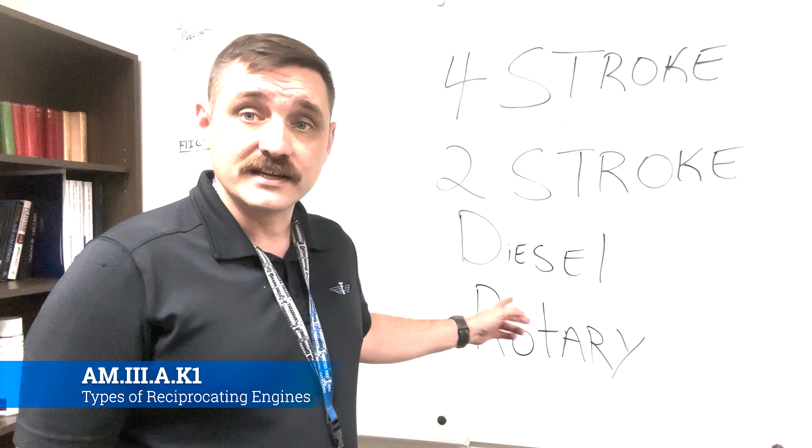Now, the way that a lot of these differ: whereas the four-stroke has those four strokes, the two-stroke combines some strokes and operates a little bit differently. With diesel, the primary difference is that instead of having a spark plug, it has a glow plug. So instead of sparking the fuel into explosions, it heats it and then compresses it. And that combination of heat and compression with the glow plug causes the fuel to ignite and causes it to crank up. There are some distinct advantages between regular gas and diesel, but we won't get into that here. We're mainly going to live in the four-stroke lane, but I want you to know that there are other types of engines out there as well.

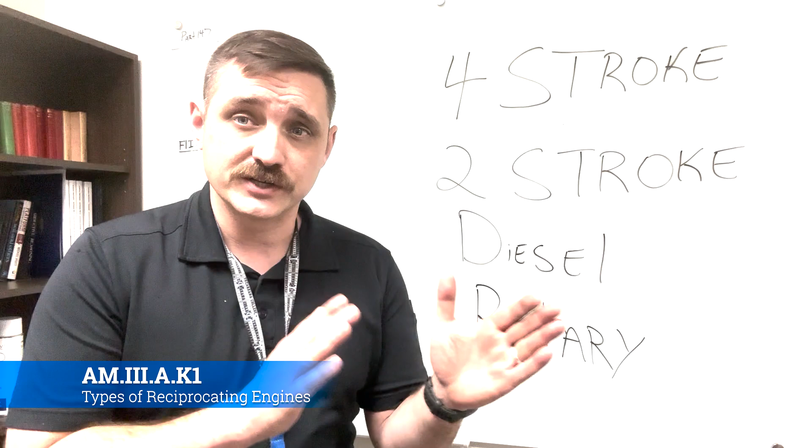Lastly, you have a rotary engine. Rotary engines are kind of starting to make a comeback. They tried to get them going a long time ago, and they were too complicated and they couldn't make it work. Now, I believe Mazda is actually coming out with a rotary engine for a car, and the idea is that it's one continuous cycle and has a lot of intermingling parts and pieces that make that cycle happen. Kind of similar to a jet engine, except it still has valves and strokes and all the other good stuff. It's just put in a circle and moves around, a little more complicated than we need to get. But just know that these are other types of engines out there, along with different differentiations of engines by their cylinder configuration.

Okay, there are several different types of reciprocating engines out there. We've talked about the horizontally opposed, where the cylinders are opposed to each other. We've talked about the V, like your V6 in your truck or whatever. They're set up as a V. You have all different manners. One of the other types that's most common is the radial engine. The radial engine has some distinct advantages over the horizontal engine, but it's also a little bit more complex because instead of having a camshaft, you have a whole different type of setup, and every one of them has its own individual part.

I'll tell you just from experience, they're difficult to time. It takes special tools, and you have to get every single one of them right. They also leak a lot. There are all kinds of reasons to not like the radial engine, but there are also a lot of reasons to like it. They're probably the most romantic engine you're going to come across anywhere in aviation. And you're going to work on this R680, which is stamped 1942, if I recall. So it was flying during World War II. You'll work on that here.